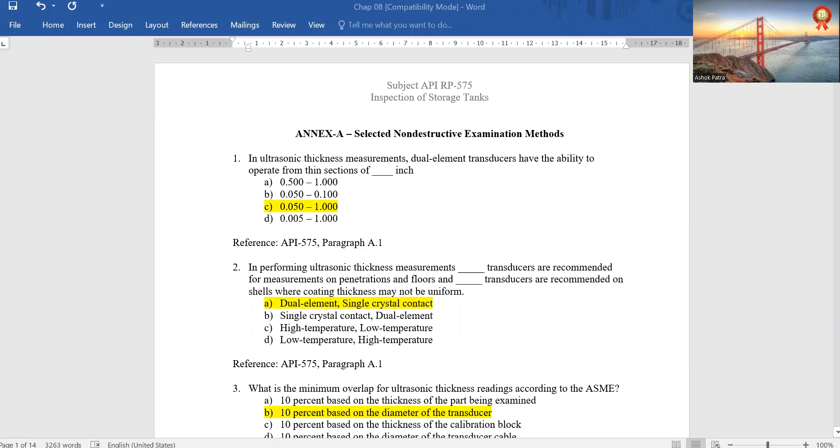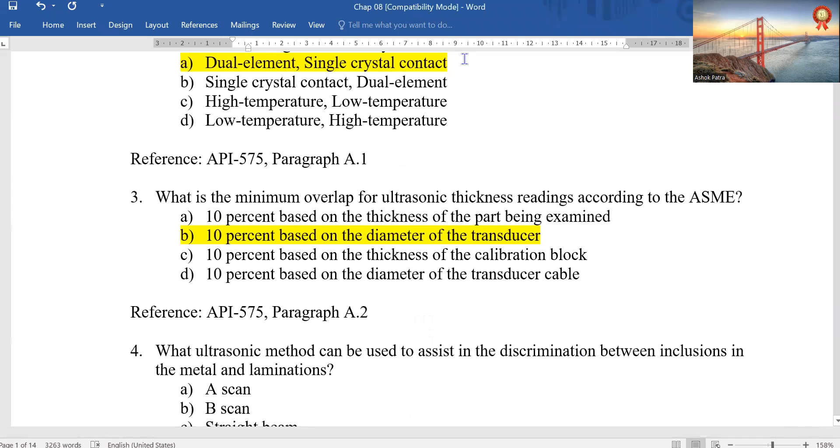API 575, inspection of storage tanks.

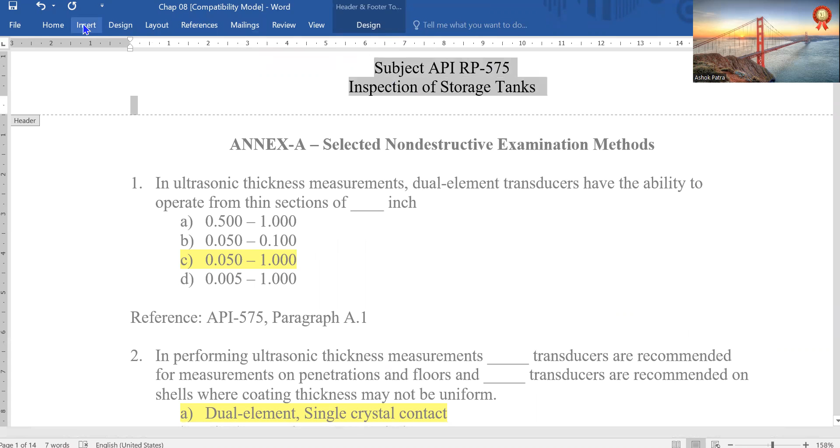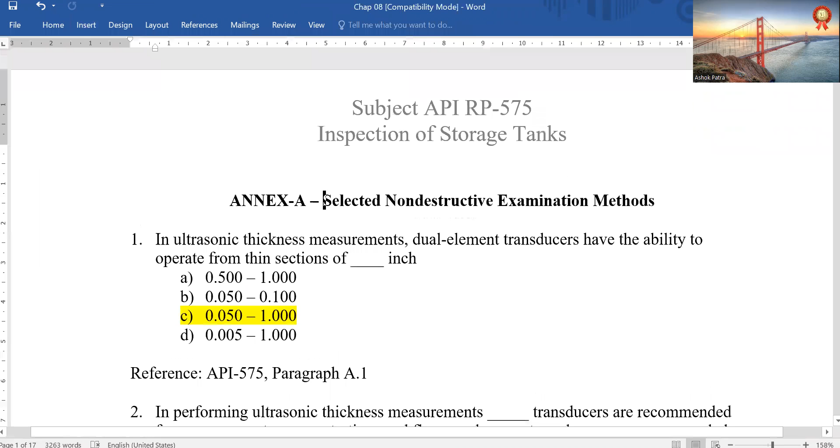Annex A, selected non-destructive examination method. The ultrasonic thickness measurement dual element transducer has the ability to operate from the section 0.05 inch to 1 inch.

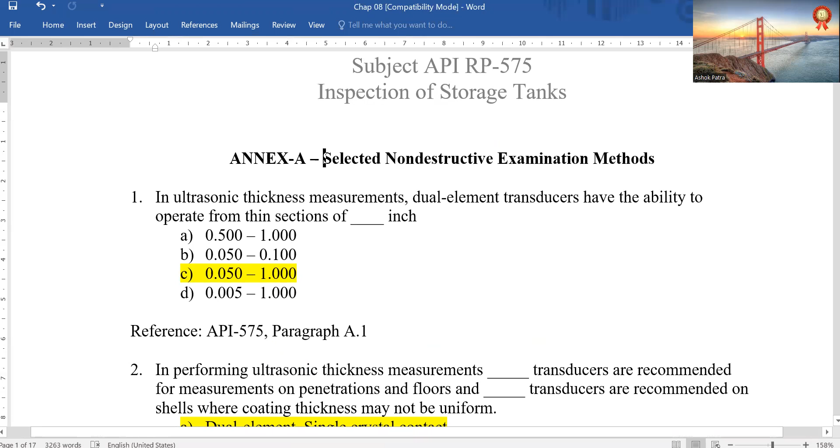So 0.05 inch, you can calculate how much mm. 25.4 is about 1.25 mm. So okay, to 1 inch, that is 25 mm, 25.4. Okay.

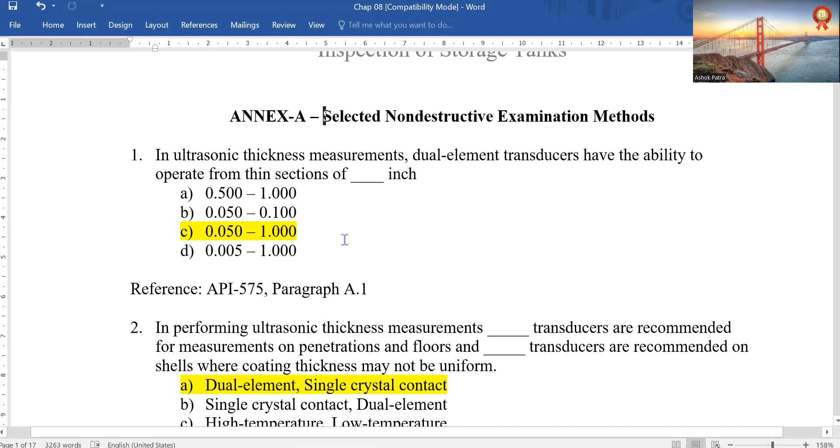Even it is more than this. Thin sections, okay, from thin sections up to this. This is as per paragraph A1.

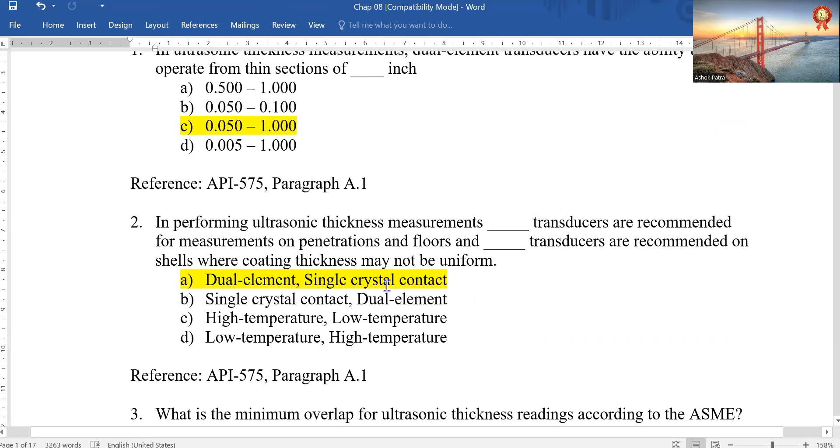In performing ultrasonic thickness measurement, dual element transducers are recommended for measurement of penetration and floors, and for measurement on penetrations and floors, single crystal contact transducer is recommended on shells where coating thickness may not be uniform. So when it is not uniform, then single crystal is recommended. These are recommended practice. You can use anything.

What is the minimum overlap for ultrasonic thickness reading according to ASME? 10% based on diameter of the transducer overlap.

What ultrasonic method can be used to assist the discrimination between inclusion in the metal and lamination? Shear wave.

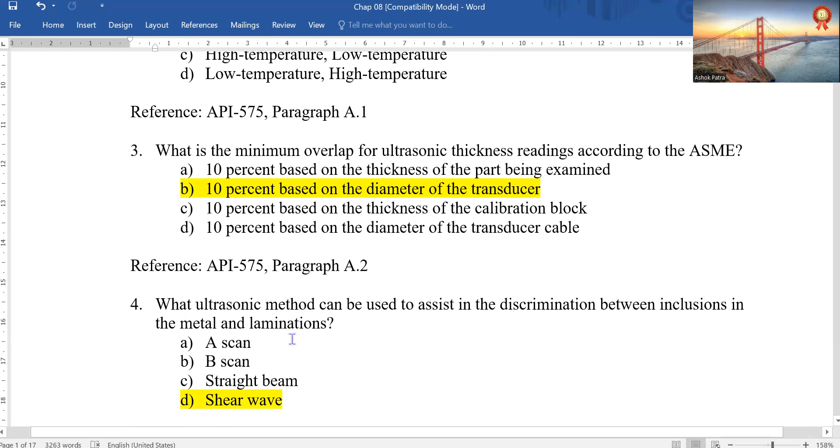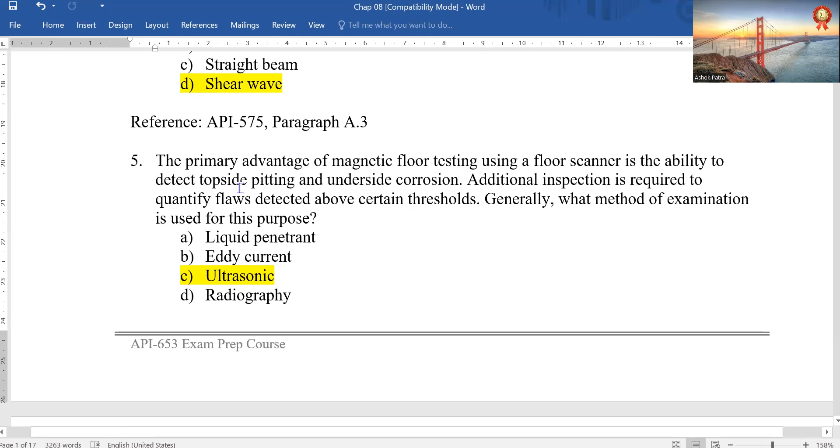API 575, paragraph A3. The primary advantage of magnetic floor testing using the floor scanner is the ability to detect topside pitting and underside corrosion. Additional inspection is required to quantify flaws detected above certain thresholds. Generally, the method of examination used for this purpose is ultrasonic.

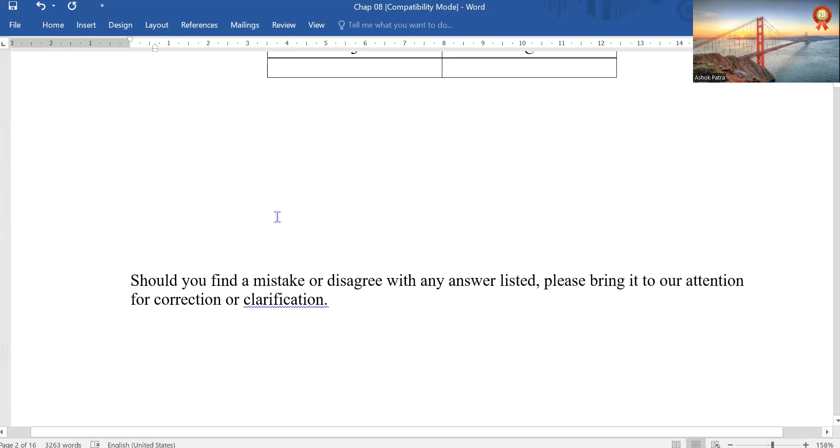The next chapter is section 4, types of storage tanks. API 575 states that atmospheric storage tanks are used for fluids having a true vapor pressure at the storage temperature that is substantially below atmospheric.

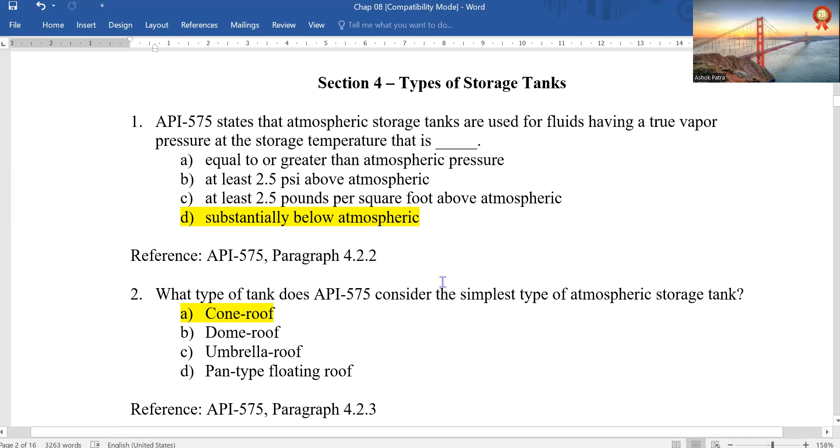Only the temperature increase that time some vapors are there. What type of tank does API 575 consider the simplest type of atmospheric storage tank? Cone roof.

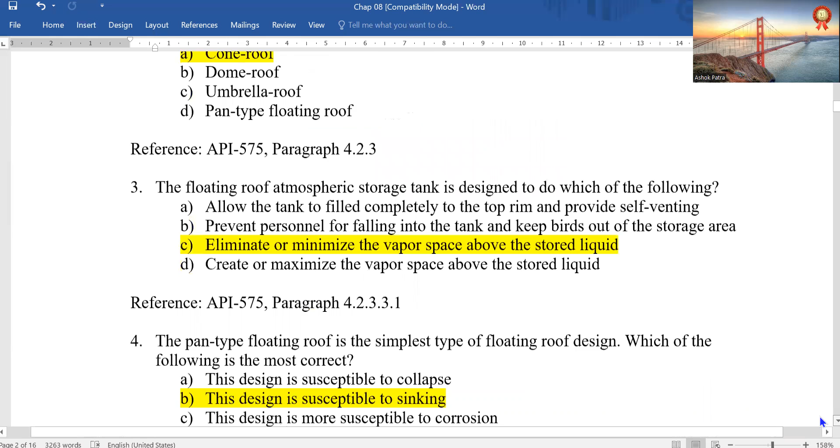There are so many things: dome roof, umbrella roof, pan type floating roof. Many things are there. You can go through chapter 4.

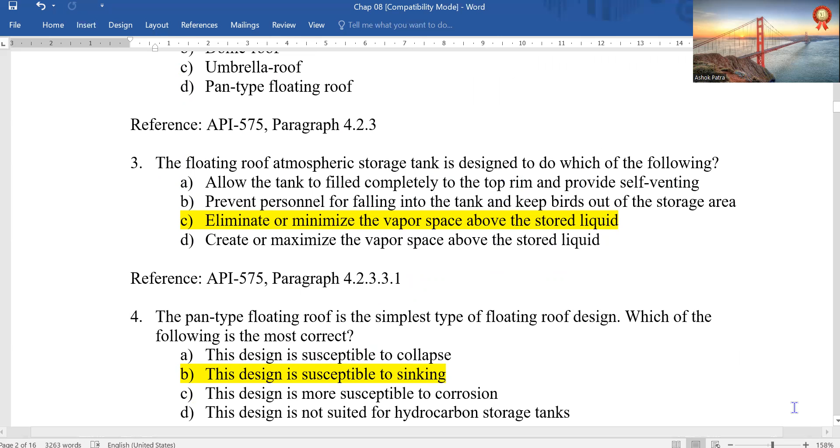The floating roof atmospheric storage tank is designed to do which of the following? Eliminate or minimize the vapor space above the stored liquid. So vapor space will minimize and it will not come out of the tank, which may be dangerous due to ignition, due to poisonous or anything it may be.

The pan type floating roof is the simplest type of floating roof design, which of the following is the most correct? The design is susceptible to sinking. 4.2.3.3.1.

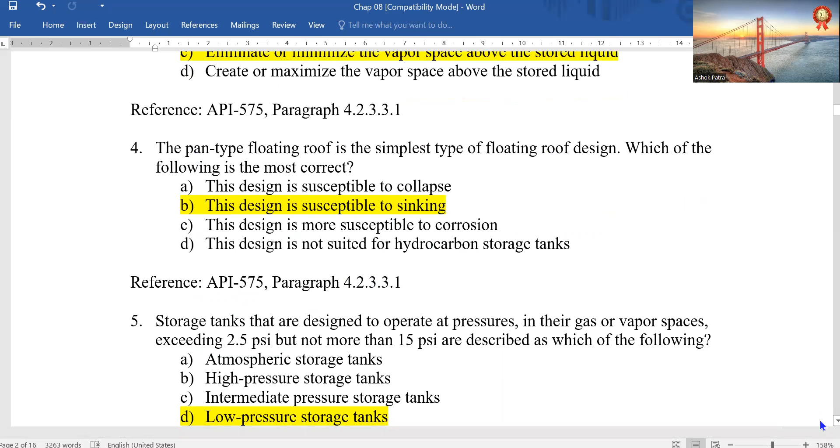Storage tanks that are designed to operate at pressure in their gas or vapor space exceeding 2.5 psi but not more than 15 psi are described as which of the following: low pressure storage tank.

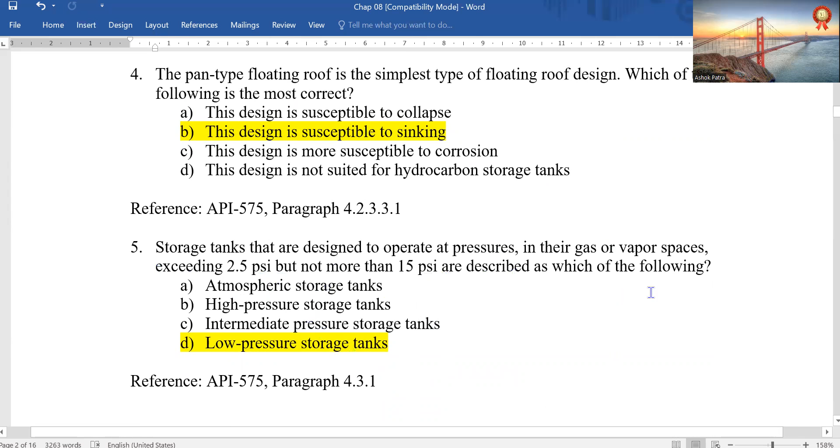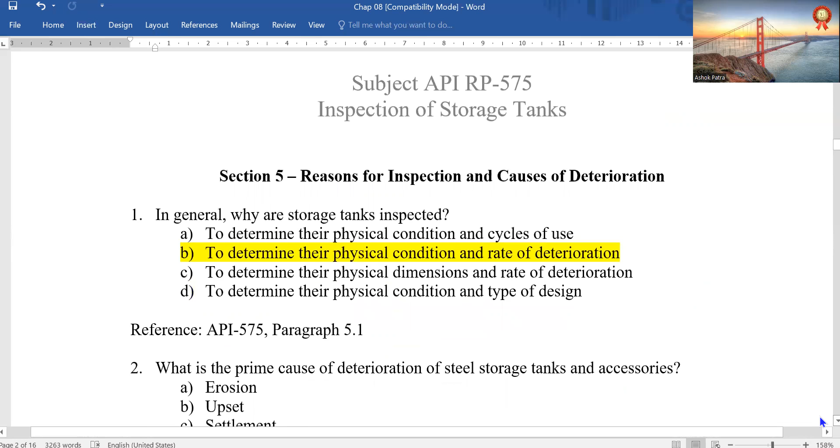In the next chapter, section 5, reasons for inspection and causes of deterioration. In general, why is the storage tank inspected? To determine their physical condition and rate of deterioration.

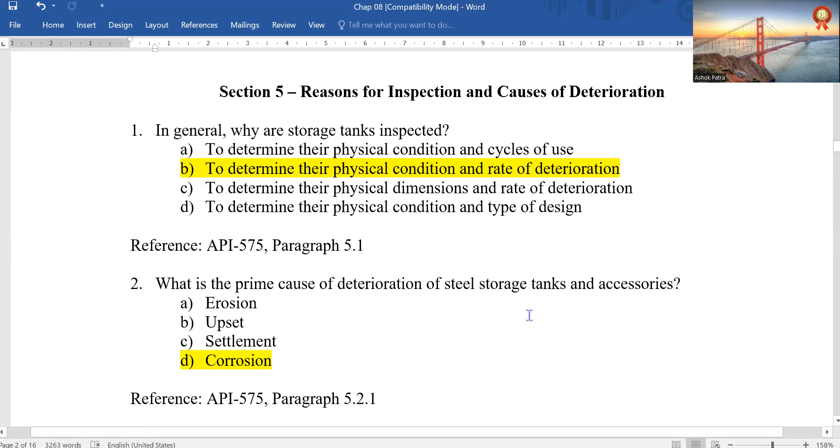What is the prime cause of deterioration of steel storage tanks and accessories? Corrosion.

A sand pad beneath the tank bottom is found to be contaminated with gravel and crushed stones. What type of problem could this contamination cause? Pitting corrosion at points of contact.

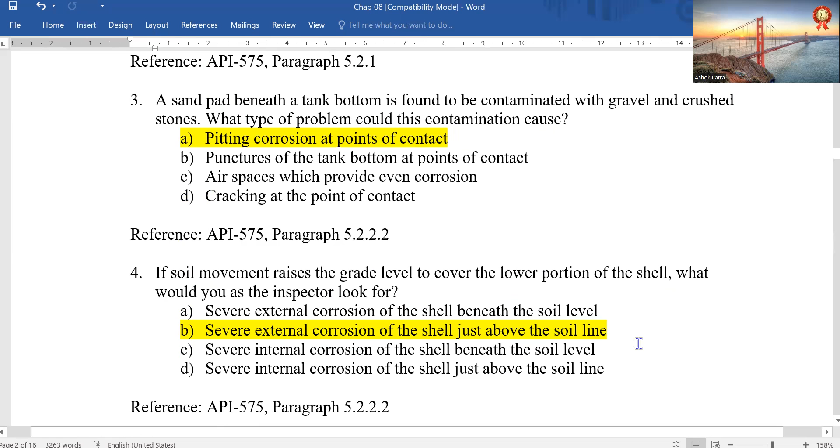If soil movement raises the grade level to cover the lower portion of the shell, what would you as the inspector look for? Severe external corrosion of the shell just above the soil line, not beneath.

Atmospheric corrosion can occur at all external parts of a tank. During your inspection, you notice considerable damage to the protective coating and accelerated corrosion rates. What would you suspect the cause to be? Sulfurous or acidic atmosphere.

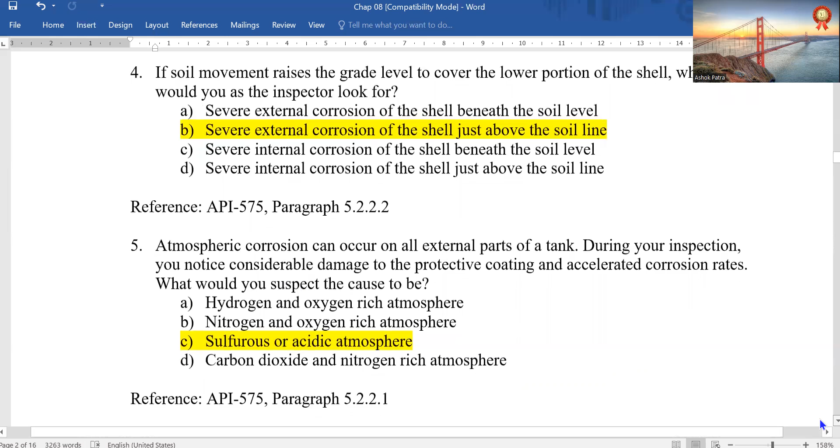These are atmospheric corrosion. Internal corrosion in the vapor space above the liquid in crude oil and petroleum product tanks is commonly caused by hydrogen sulfide vapor, water vapor, oxygen, or any combination of the three.

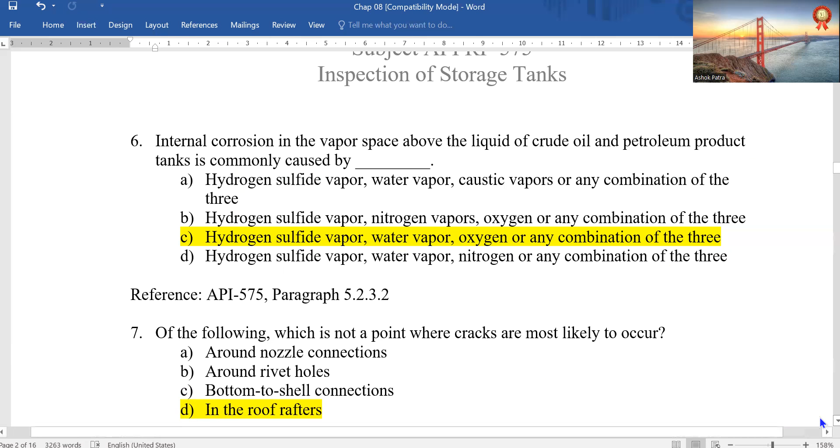Of the following, which is not a point where cracks are most likely to occur? In the roof rafter, around the nozzle connection, around the rivet holes, bottom to shell connection.

Yes, there is cracks. In the roof, there is leakage, holes because of corrosion or some water drainage problem, something like that.

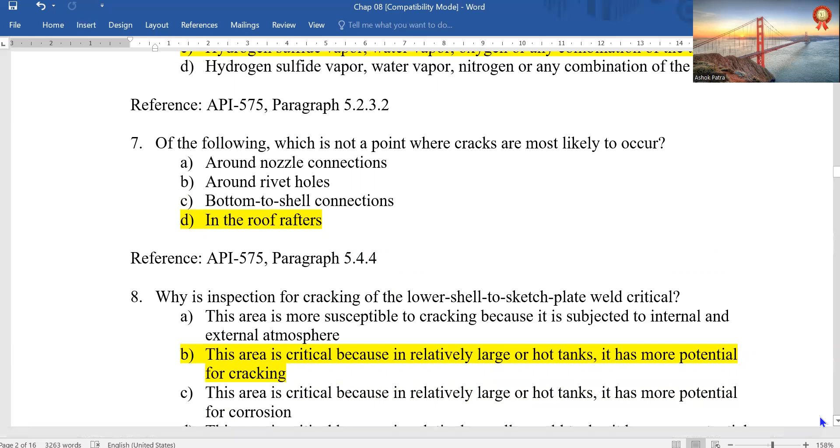Why is the inspection of cracking of the lower shell to sketch plate weld critical? This area is critical because in relatively large or hot tanks, it has more potential for cracking.

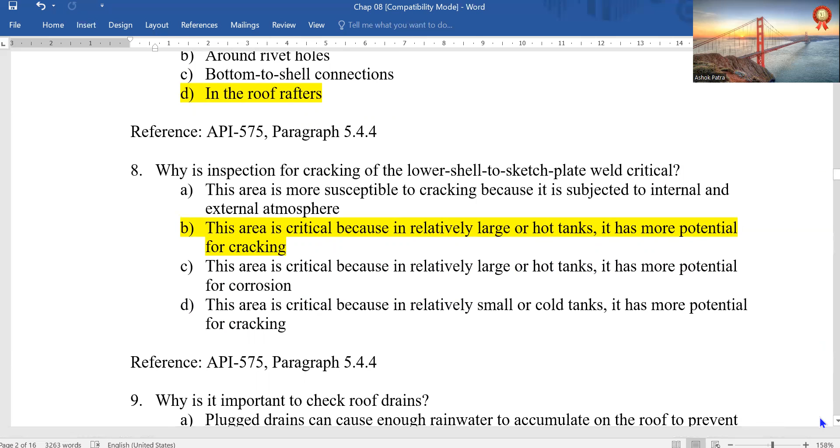Why is it important to check roof drains? Blocked drains can cause enough rainwater to accumulate on the roof to sink a pontoon type floating roof.